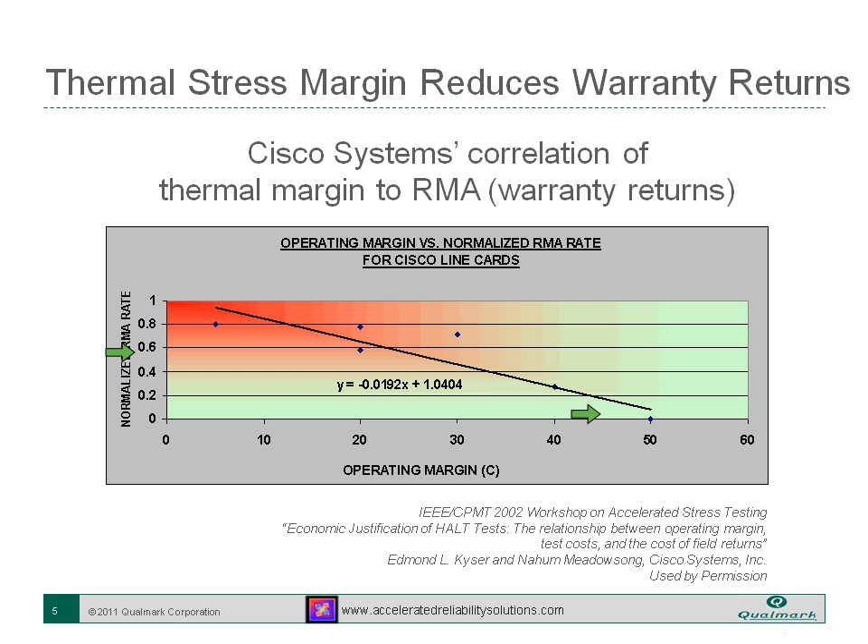But you have to pull it until it breaks. You have to find the limit, the empirical limit. We want to first make sure we get the definitions in order here. What you'll mostly find in HALT, and especially in digital hardware, is the operational limit. That's the empirical limit, not a theoretical limit, but an empirical limit where you actually test the unit and increase the stress until you find it stopped operating.

And that's with, of course, all the over-temperature protection mechanisms defeated if possible. Sometimes they're built in and difficult to remove, such as the CPU. In that case, we would use a water-cooled block to prevent the thermal trip of the CPU, with the rest of the system being able to operate anywhere from 110 C to up to 130 C of upper temperature margin.

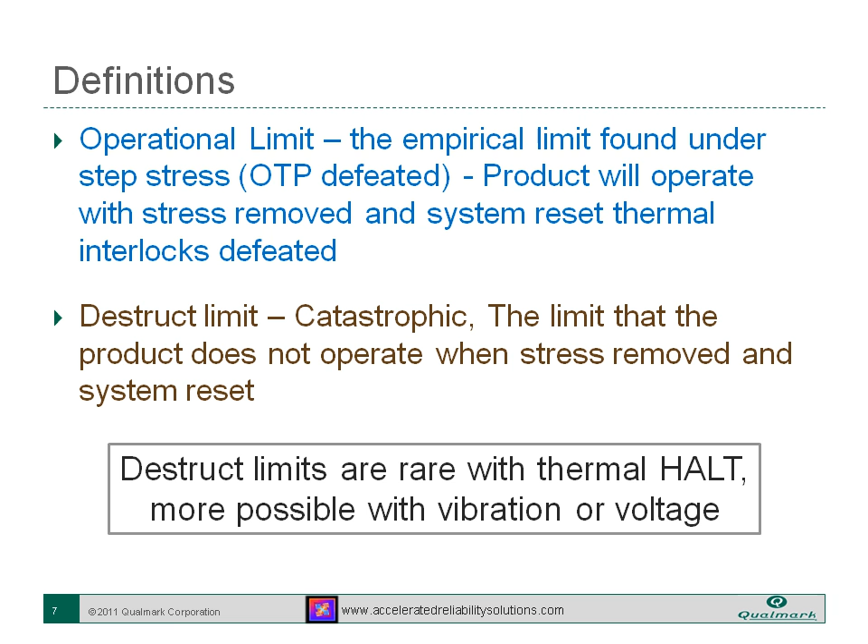It's more likely with power supplies, but still very difficult, and more possible with vibration or voltage. But I have vibrated many power supplies at the top capabilities of HALT chambers, and they survive for a significant period of time.

HALT testing, we want to have a quick review of what it is. It's called a highly accelerated life test, but it's not a life test at all. It's conceptually simple, basically a step stress test. We use a single stress when you're beginning to do HALT.

You want to start out simple to make it easier to analyze the cause of the failures. Generally, we start in an order of cold first, heat, and then vibration and/or voltage, using each one to understand each limit that entails.

Steps are 5 to 10 C for thermal and 5 to 10 G's RMS. But when you get to the first destruct level, as you get close to the anticipated level, you might do smaller steps to get better resolution of where those limits might be.

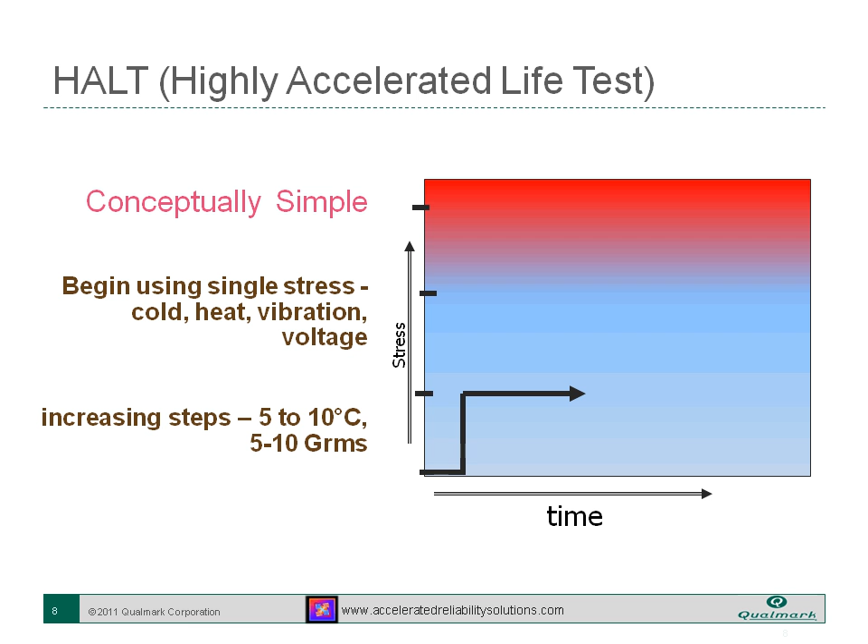We want to stress again to empirical operational limits, and sometimes that is a destruct. Now you have your functional time here.

Make sure that you're testing when the product has reached somewhat of a thermal equilibrium, but you'll also find as you develop skills in HALT that transitions will be important too. At first, just simply ensure that you can have significant test coverage during this period at least.

So your steps may be more than 10 minutes if your diagnostics take longer than that.

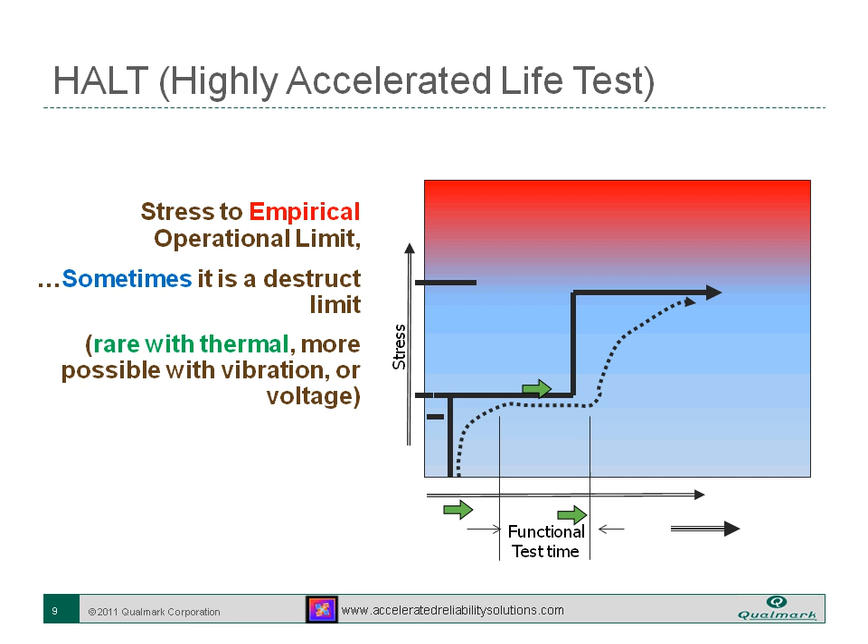So if you can, you want to find the root cause. It's not always possible. You might identify the root limiting component, and if that's the case, it may be easy to just replace that component with a higher power or higher capability component.

And you want to go up to the standard materials, just using standard materials processes, what we call the fundamental limit of the technology. Increase the operational margin till you can reach the fundamental limit of technology.

You will find that you'll set in your own mind a benchmark. Once you start testing your own products and finding limits, then you'll set a new standard of what you should expect the next generation product to be able to operate to.

After you start doing one stress, it's important to also add combined stresses. This is an absolute must in what would be a screening process, a highly accelerated stress screening. Some of those stresses could be thermal, voltage, clock frequency changes, vibration, and even in the IT industry, you would want to use different software applications, different functions such as graphics or hard disk accesses.

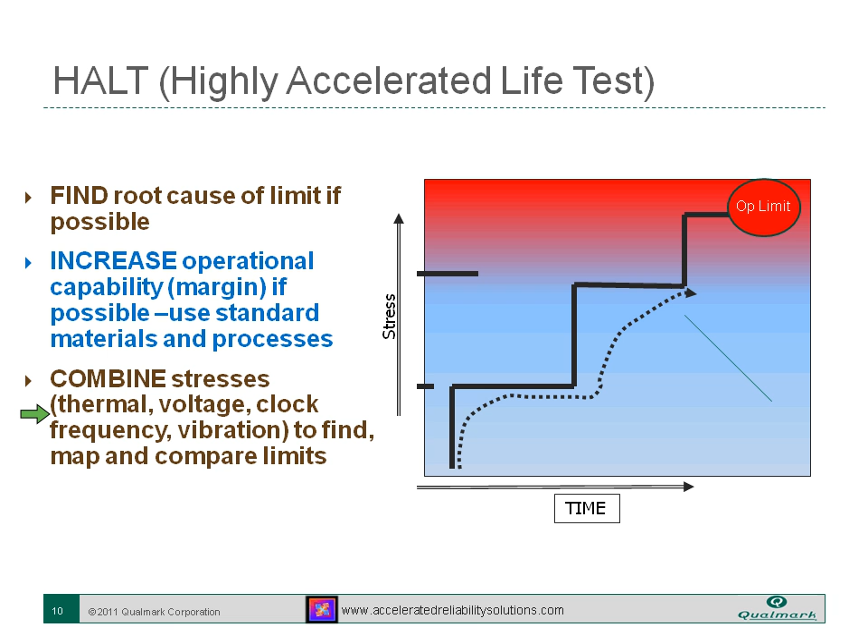There's been a lot of talk in the past, and certainly in the last 20 years, everybody thinks about HALT and the life test, that you should be able to come up with an MTBF number or a lifetime number in the field. The reality is there is no single or combined accelerated test that can give you a system's lifetime equivalent.

I've circled here some of the mechanisms, or some of the devices, that you'd have to model and have an understanding of to be able to give a lifetime number.

You've got a VIA, all these devices, these solder joints, this probably an MLCC, are all going to fatigue at different rates depending on the IC, what temperature it reaches, where it's placed on the board. The VIA is going to fatigue and crack at a different rate. All of them have a different rate in response to the end-use environment.

And you'd have to know a tremendous number of SN curves, various values for the Arrhenius equations, if it's even relevant, and many times it's not. In fact, most of the time the Arrhenius equation is not a valid mechanism driving these mechanisms.

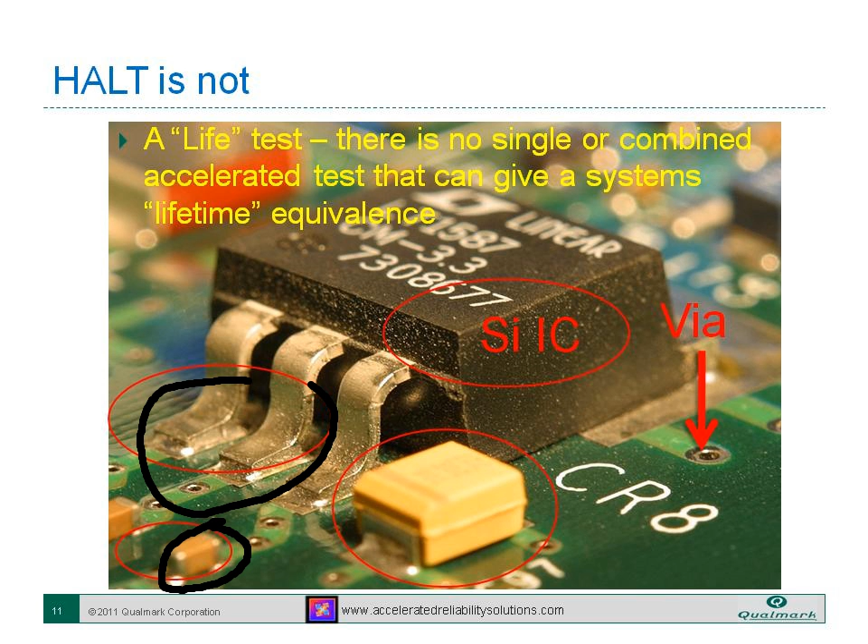Here's a personal experience, and it's about long life in electronics. Our kitchen radio, my father bought this back in 1978, handed it down to me. It's going to last forever, it may outlast my life. But 35 years, and I'm sure the MTBF prediction was quite short, and certainly not 35 years.

But all of our electronics have more life than we need, and we need to start to be efficient at developing reliability. We need to use that life and the broad stress capabilities in most electronic system assemblies. When I talk about electronics here, I'm not talking about individual discrete components. I'm talking about HALT testing performed at a circuit board and operating system level, a motherboard, a graphics card, or a small power supply.

Okay, here we have some components that got the smoke let out. This is a hard failure, of course, and these are fairly rare in HALT testing. You'd be surprised how rare you find these, but it can happen when two components short together during vibration.

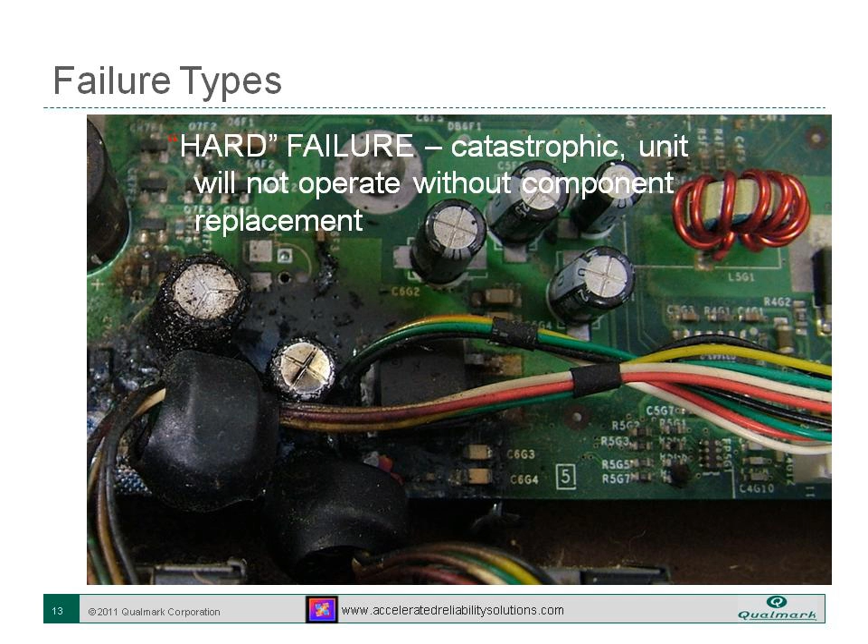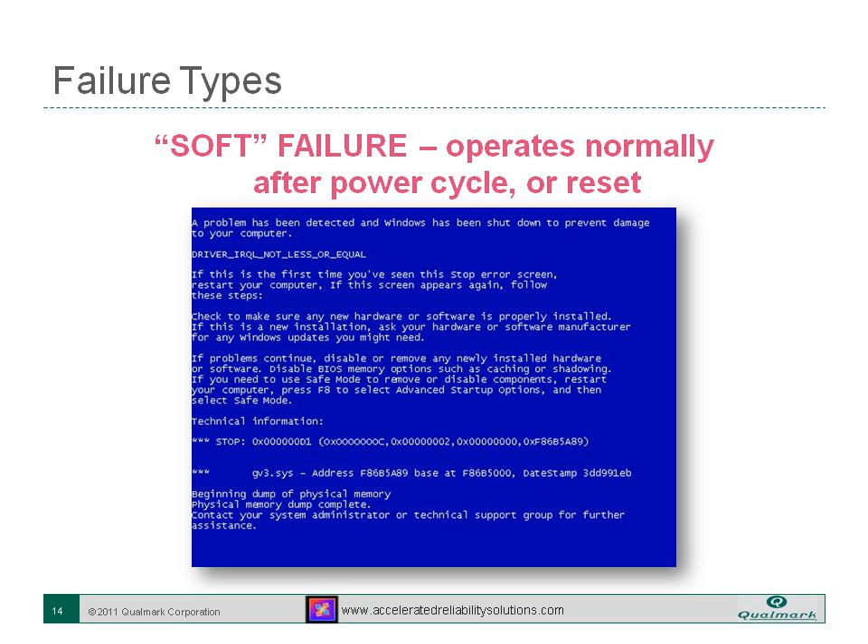And so this is one of the more significant aspects that needs thermal stress, and thermal HALT can do a very good job of helping produce these soft failures at a much higher rate. I have observed that in IT equipment in many of the experiments I did.

So here's a graphical way of looking at why we can be very efficient at detecting the problems during development that we're going to see in mass production in the field.

When you are starting to develop a product, you have a very limited number of samples. Your distribution about a certain parametric value is going to be fairly tight with just a small number of samples. You're certainly not going to see the very low failure rates, or hopefully less than that, 5%, but that could be significant considering what your product is. It's going to be very hard to see that with 5 to 10 or so products.

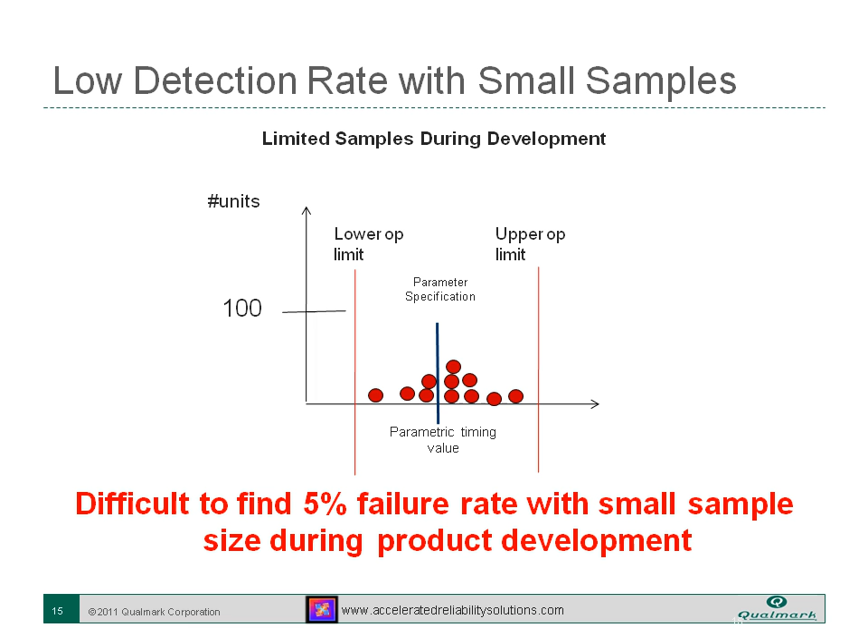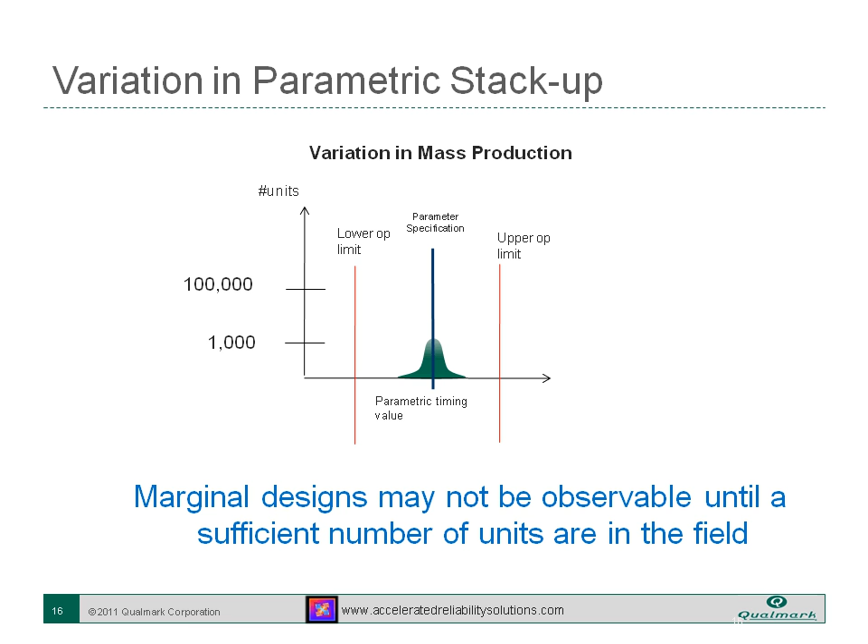But you're going to see variation when you start to produce mass quantities. As you increase the volume of manufacturing, your distribution of components may include second source components. There'll be changes to the product over time as far as manufacturing processes. And what's going to happen is, as you increase this, you're going to get closer to the operating limits.

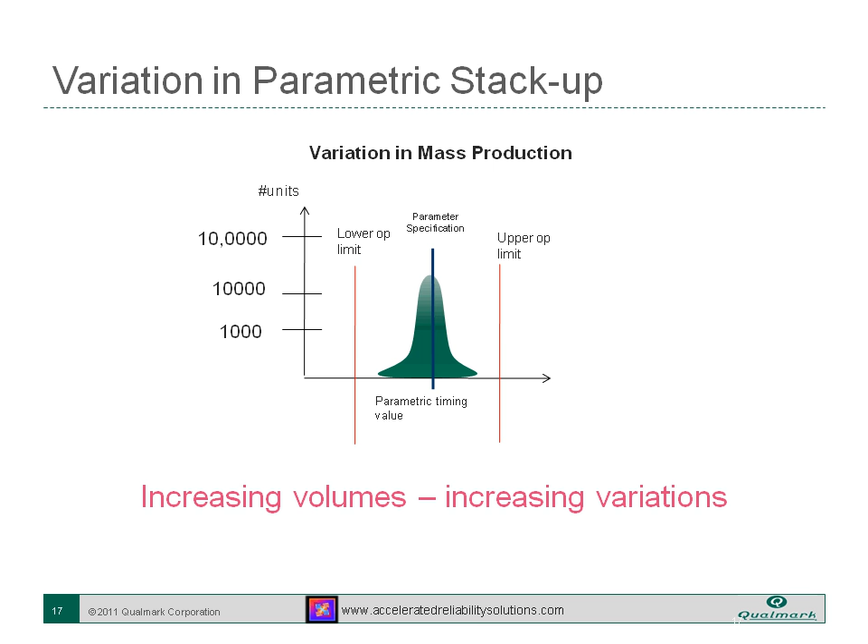Eventually, you may run into this problem where the tails of the distribution, or the most extreme variations, start to get into the operating limits of the capability of the circuit. Now, of course, you've got hundreds of components in a typical motherboard, all having some variation, and whether that variation is going to be a factor in reliability depends on its function in the circuit, how well it's centered in the circuit, and the variation that will occur in manufacturing.

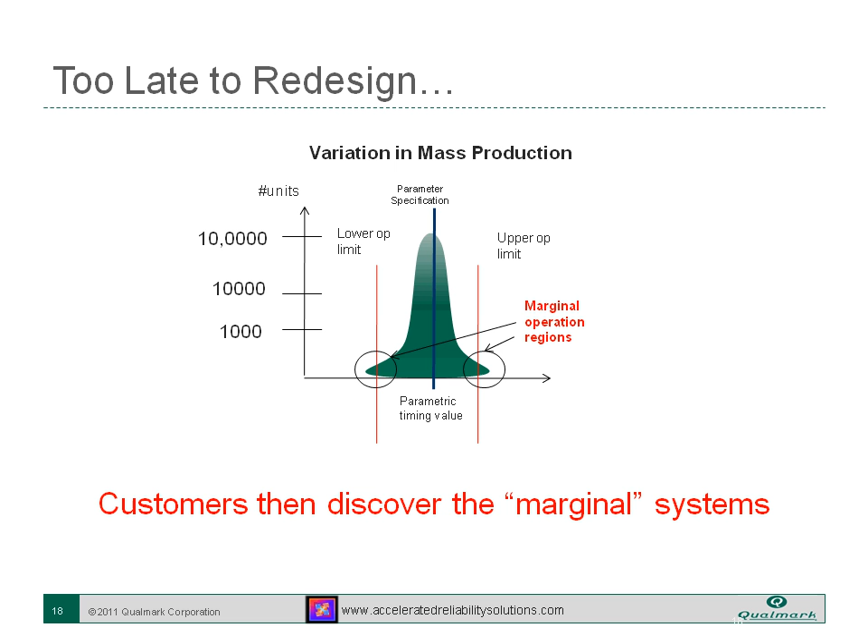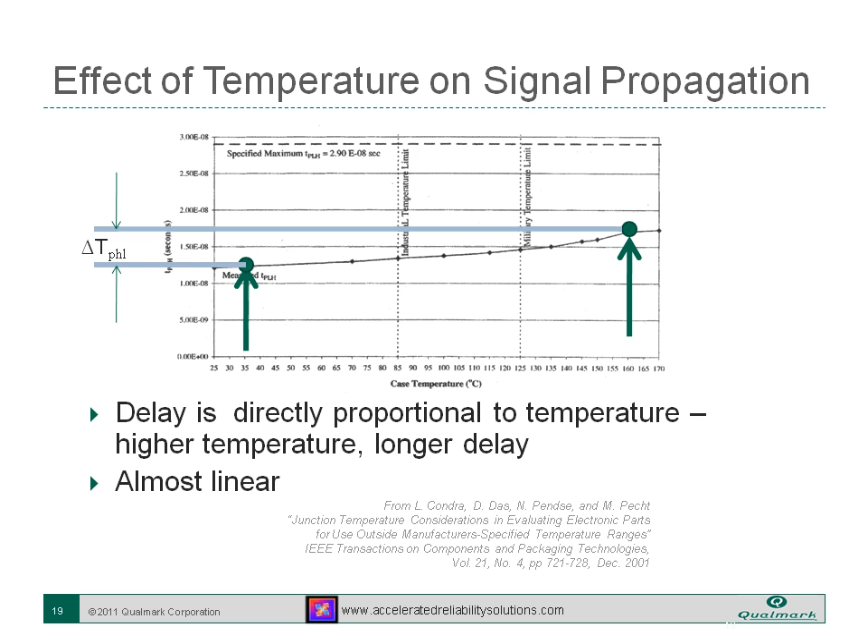So the benefit of HALT, and using HALT to its limit to define the operating limit, is that as you heat it up, you increase the electrical impedance and slow down the signal, as you saw in the previous slide.

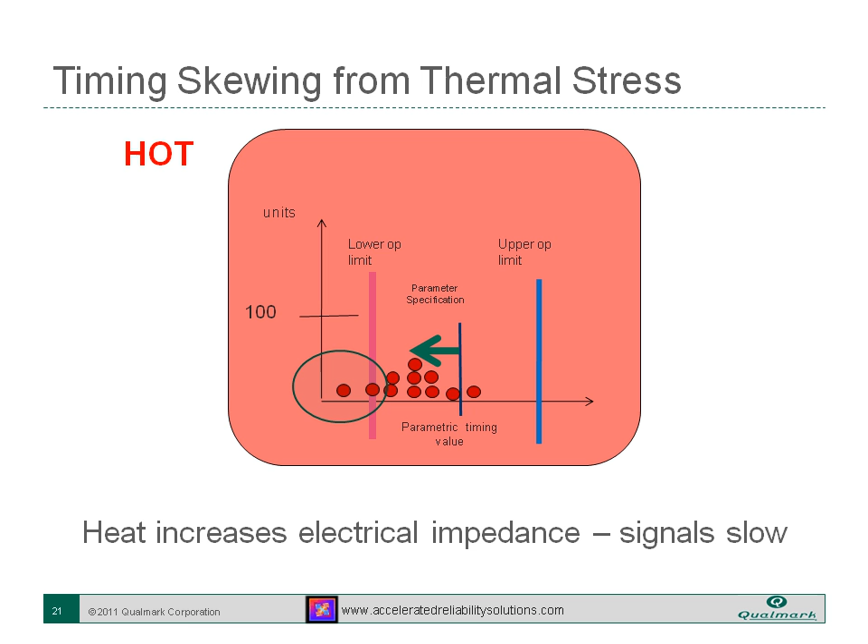And you may push that small group of samples into the lower operating limit and see the failure that you may see in the larger population in the field during mass production. This could also be because of component drift over time, that it would cross into the non-op area.

Of course, with cold, you get the same effect on the opposite side. You start to speed up the electrical signals and skew the timings to a higher speed. Again, you may reach an upper operating limit,

and that can give you a good indication of what your risks are and the variation in the mass production population. I know Gregg Hobbs used to talk about precipitation and detection of screens. I don't believe it's very useful or necessary to go above the operating limit, and especially with thermal, you'll find you have significant room to do testing under if you limit it to just the operating limit.

Of course, you should expand those operating limits to the maximum capability, again, to the fundamental limit of technology.

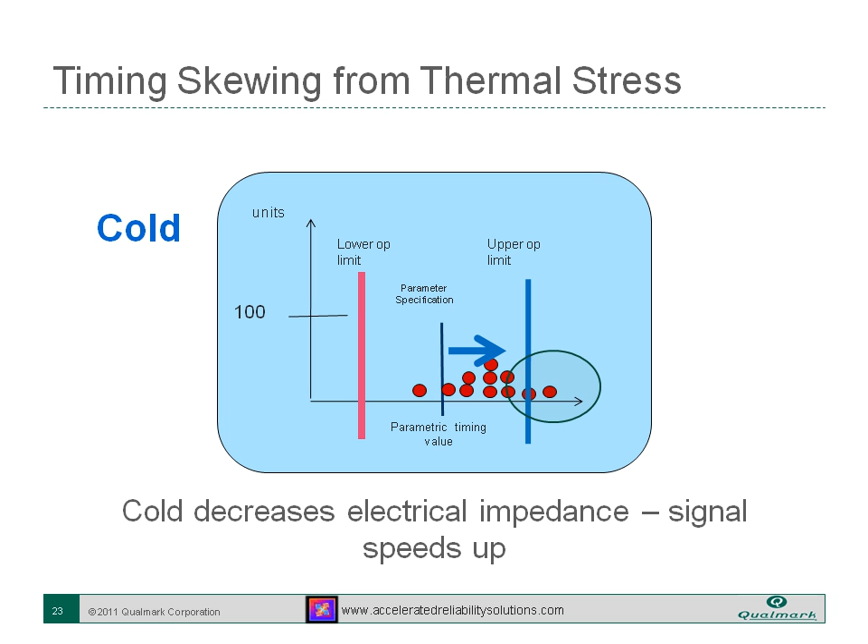And of course, the follow-on to testing beyond spec: if it fails, why should I care? It's not supposed to operate there. Well, that's not really true. There's a lot of reasons for being concerned about testing beyond spec.

Customers, first of all, may use beyond spec. I don't know how many of you know, but in the PC world and digital IT equipment world, 35 centigrade is generally the maximum specified using environment for the customer. Here in Austin, it gets well above 35, up to 38, 39 on a hot summer day, so you'd actually be violating the manufacturer's spec by using a portable computer or desktop outside at 98 degrees or whatever. And we know that customers do that all the time. People do that all the time.

So you're going to get some use beyond spec. All components have margins to allow for manufacturing, and component manufacturers aren't always setting specifications for technical reasons. It may be competitive pressure, market demand,

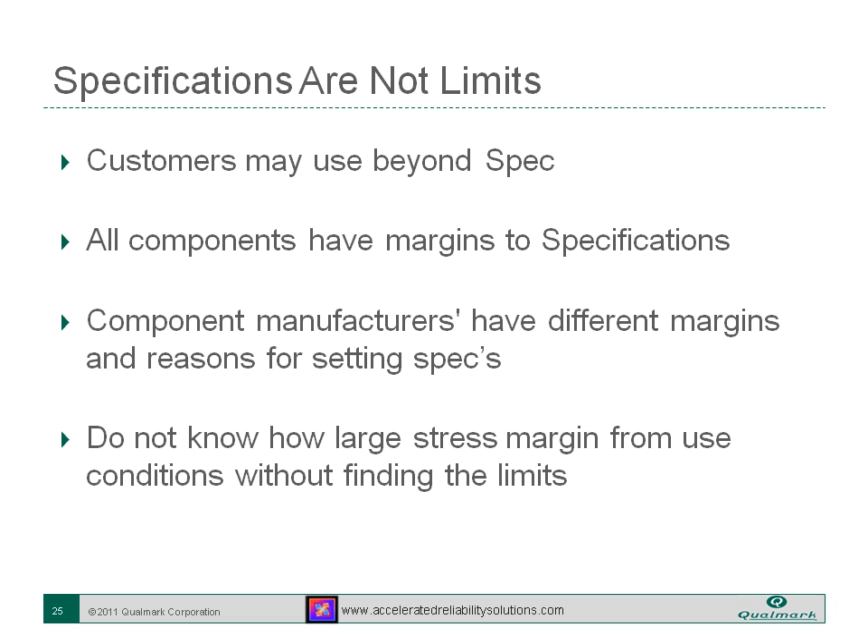Of course, margins can change in time. There is some, especially with RF components and some laser diodes, drift and aging degradation. And again, you never know how the margin of the individual component and its variation will affect the operation of the whole overall system.

It's not always the case that a component failing causes a system failure. I have observed in a system that had 28 of the same devices that the device was manufactured wrong and had a very early life wear-out mode, and in those 28 locations in the circuit, only three or four caused the system to fail. We actually couldn't get the rest of the motherboard to fail with the other devices, all having failed. So again, component failure is not necessarily a system failure.

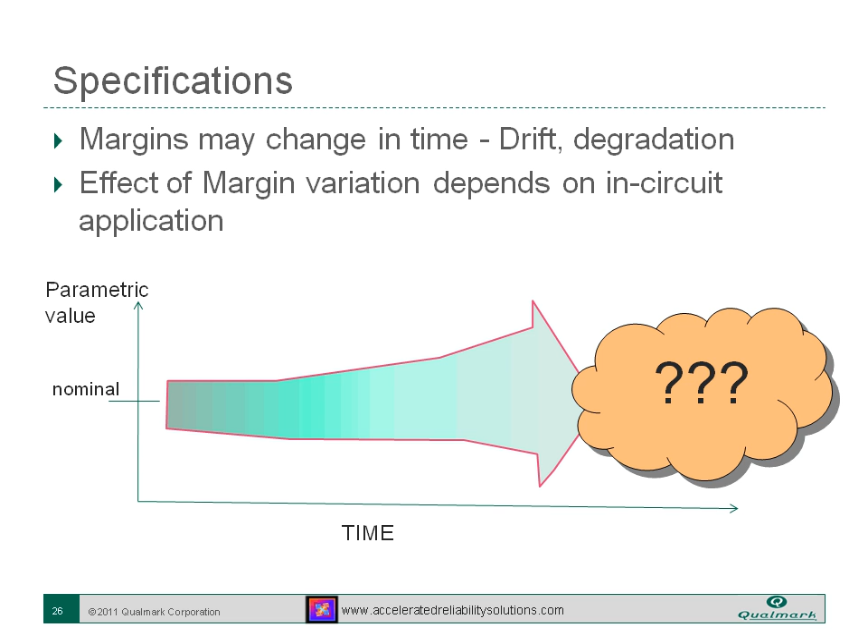This gets back to a real fundamental look at the whole purpose and reason behind HALT, and that is the stress-strength model.

Along this stress-strength axis, you have a load, and of course you have a strength. This can be referring to anything from bridges to electronic systems. As long as the load is less than the strength, you will not have failures.

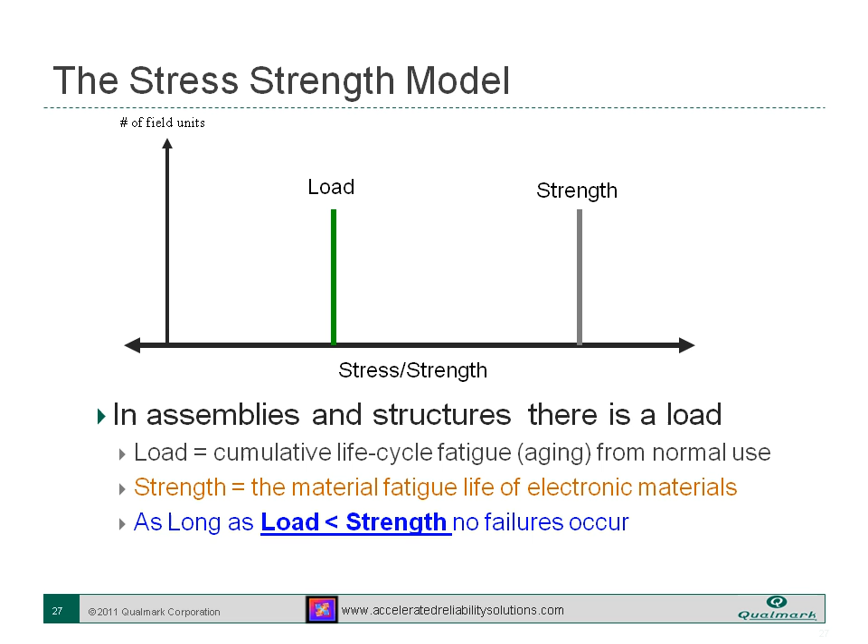Now we know, of course, that there is a distribution about that. We have, for instance, on a VGA projector, some may be mounted on the ceiling where they would have a very low fatigue life. Others could be part of a road warrior's luggage, and certainly they're going to have a lot more fatigue. And at the assembly process, we have some that are going to have a stack-up of tolerance that's going to be lower, and maybe some with a different mix of components will have a high strength.

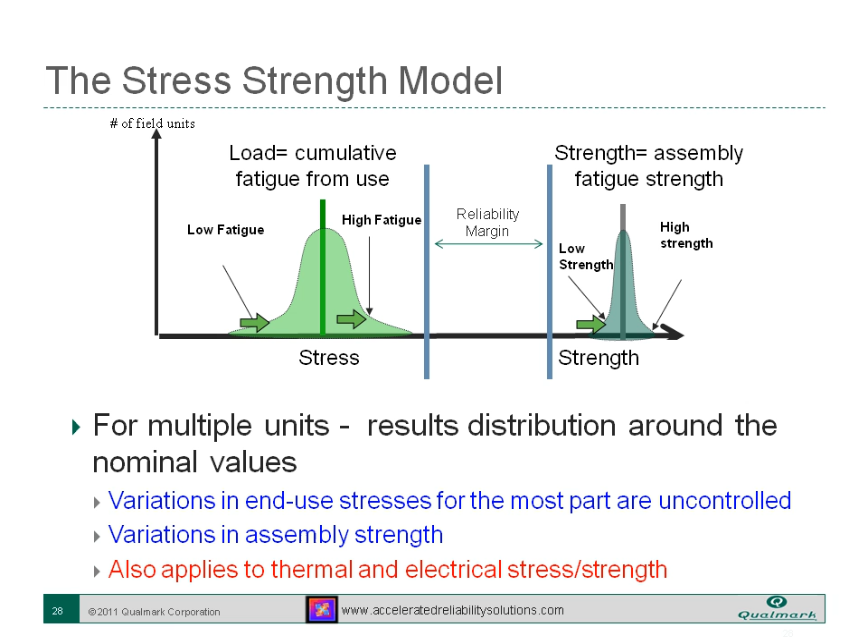The distance between these two is what we call the reliability margin. These are uncontrolled stresses; this is what the customer may use, and it's very difficult to restrict his use. And of course, this is what we hope to reduce variation with through SPC.

As the product ages and the strength declines, we will have the two curves start to cross over. And as they do, the weakest links with the worst cumulative fatigue will start to fail. It's really these tails, it's really the introduction of latent defects or an anomaly in the manufacturing process that for the most part causes the failures.

Wear out is really not a factor in at least consumer electronics, and I'd say any electronics that's used 5 to 7 years that wear out. It's mostly because of mistakes in manufacturing, overlooked design margins, and abuse.

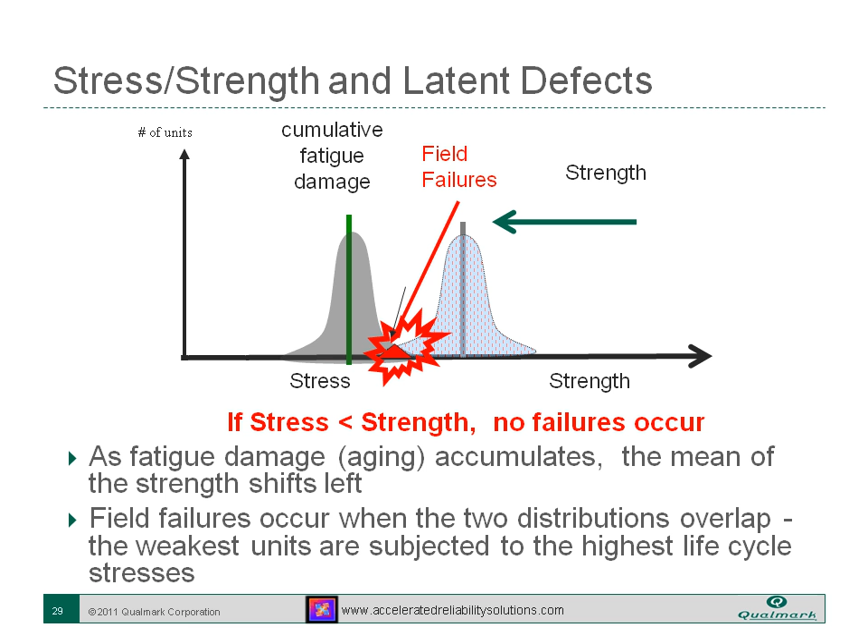So, of course, Dr. Deming taught about SPC and statistical control of your distribution. We all know about Six Sigma and the importance of reducing variation in manufacturing. And of course, that is an ideal goal, and hopefully our suppliers are all doing that.

But in a high volume manufacturing environment, or in a rapid development of product, it may not be possible to have all your suppliers and all of their suppliers perform statistical process control.

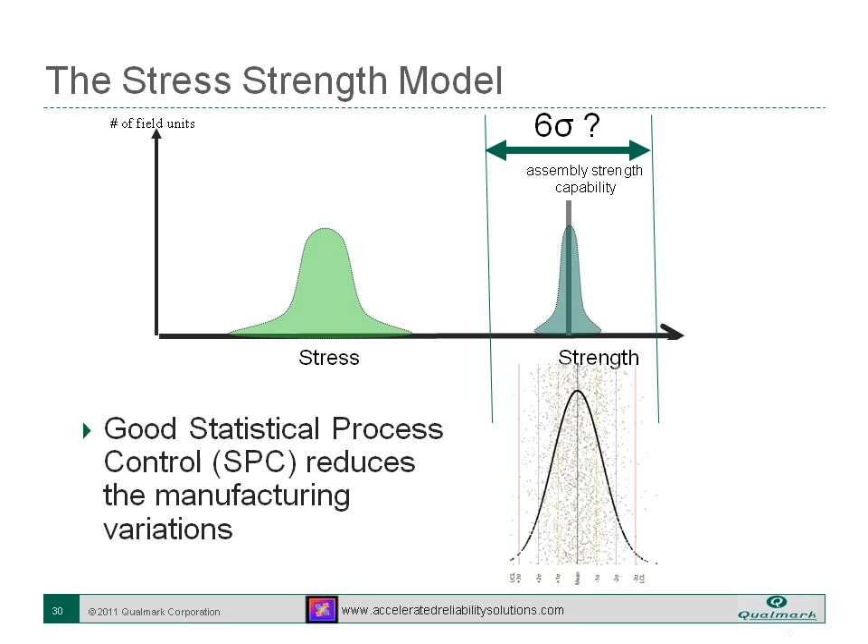And of course, the end-use environment - well, we can give the manufacturing specifications, the end-use specifications, as I say, but they may not be known to the user, or may be ignored. And of course, some systems are going to be subject to actions of abuse beyond the material strength.

The big dollar question, though, is when a customer, say, drops his cell phone or has a stress event with his product - where is he going to say, oh, that was a very flimsy product? Or is he going to point to himself and say, well, I guess I broke it? Either way, if it survives, you're going to have a very happy customer and certainly a returning customer, depending on his situation.

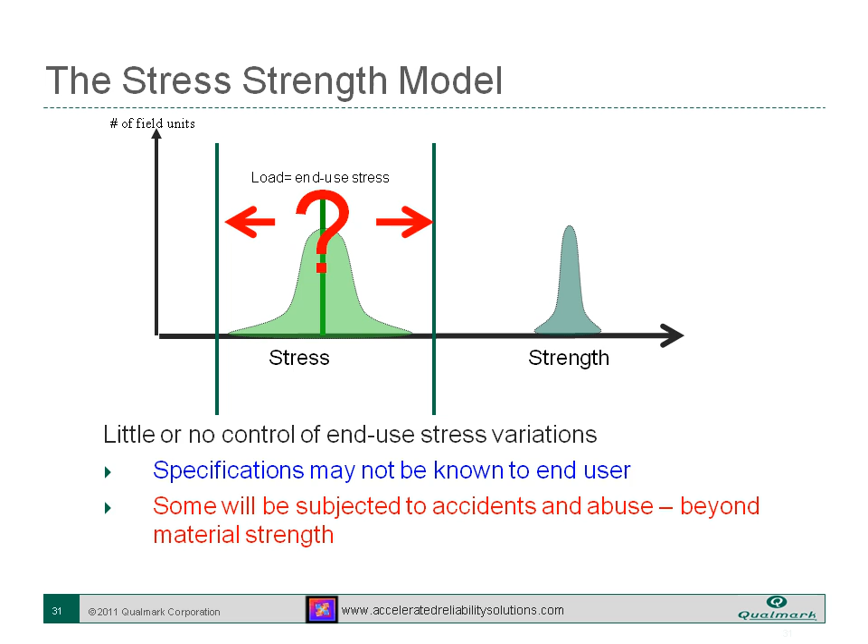Now I want to talk about stress boundary maps and what you can do with combining the empirical capabilities and starting to map out to determine operational reliability risk assessment.

A little bit of the derating boundary might be tested, but that really doesn't give you a clear picture of where you may have a problem or future variation.

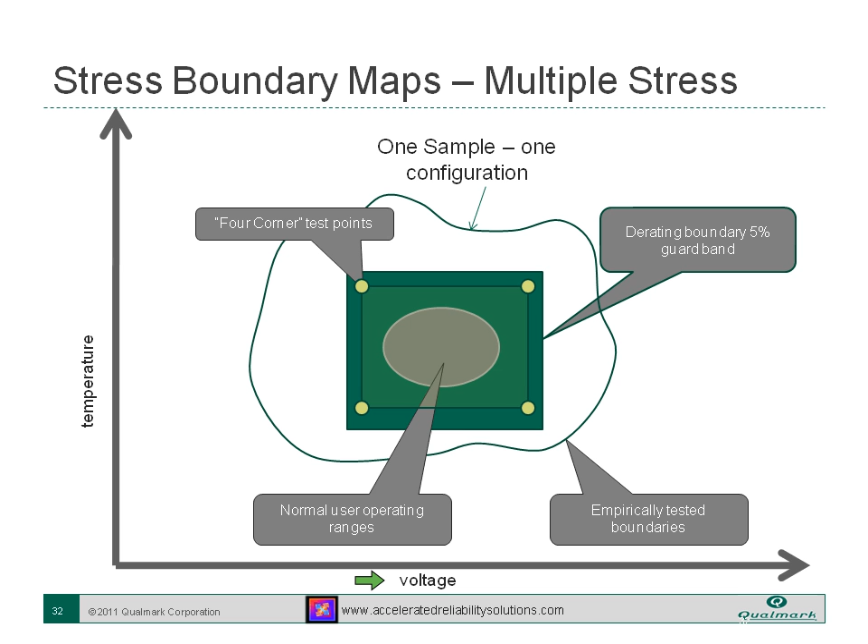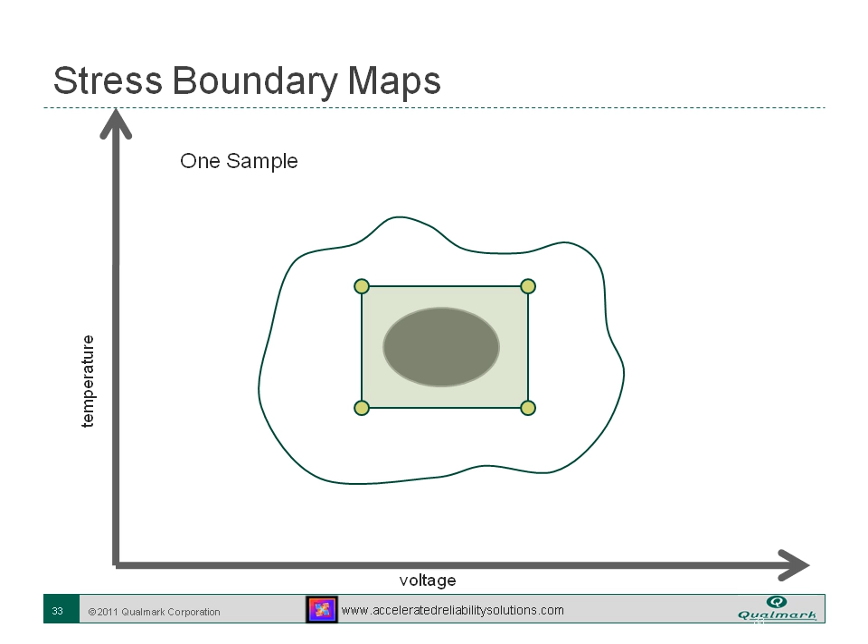As you add samples - well, first of all, one sample, you're going to get one straight line - but as you start to increase the number of samples, you may start, and maybe a second source component... if you can do a few, great, the more the better. But you're going to start to overlay those, and you may start to see now a distribution in that boundary, a variation.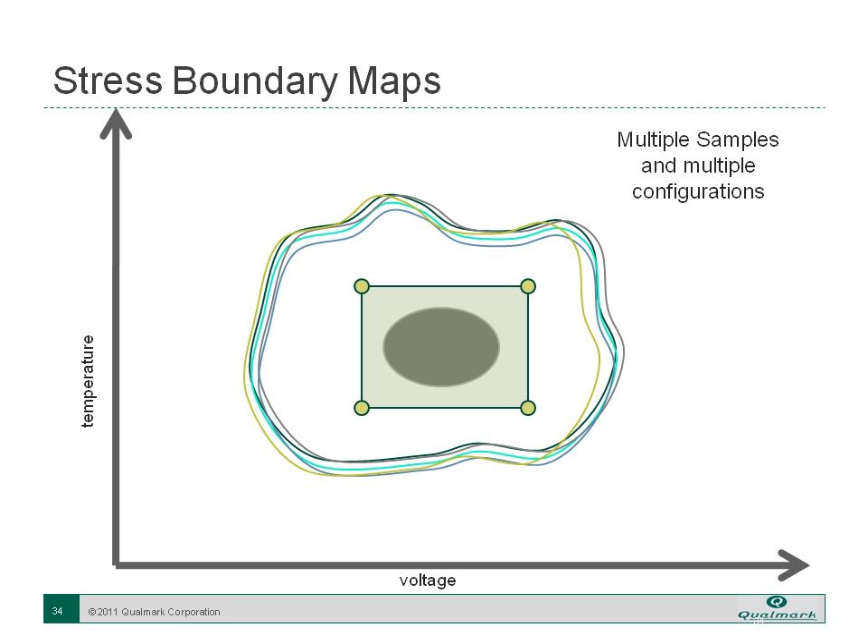And here's a good way of looking at this now that you have a map showing you the variations. You may see there's some very wide parts of your distribution in the empirical boundary map. And some of that variation - it may be a large variation, but it's far away from the end use. You have very significant margin.

In other cases, you may have a very wide distribution that gets a little more risky, in the fact that these tails may start to actually creep in - and this can be, again, over time too - that these components causing this variation may start to drift into the actual worst case in-use environment and cause intermittent or failed operation.

And this gives you a place to start to investigate what is the cause of this wide variation in this boundary, and see if you can reduce that with an increase - either increasing the margin or reducing the component specification - some way to reduce that variation in that boundary.

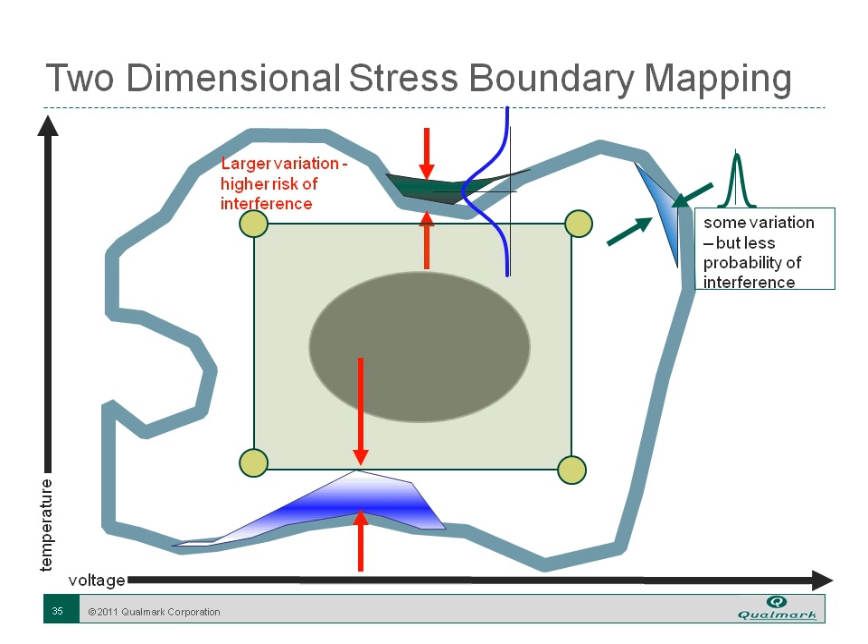But also what can happen with a component, it can also cause these boundaries to drift in an individual assembly that you may have. Again, the need to build up as much boundary, as much space, margin as you can, to help ensure that that reliability margin throughout the product's life is going to be significant.

As I say, there is so much life in standard electronics, solid-state electronic hardware, that we really don't need to be worried about calculating. We need to be worried about finding those things that impact the long life entitlement of electronic hardware.

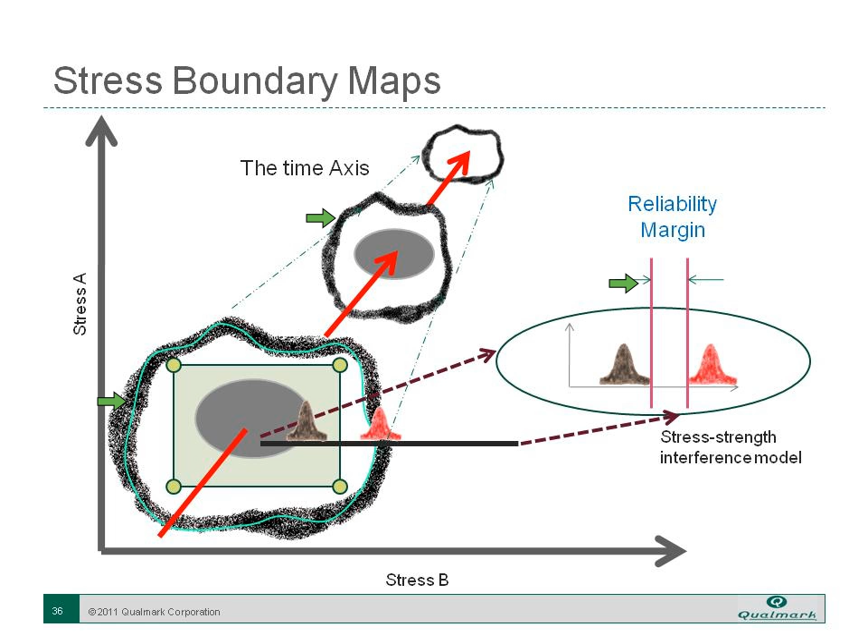Okay, and the big question is, can HALT find software defects? And of course, I found out from my 7 years experience in IT equipment that yes, it can. I'd love to show you lots of data about it, but I will show you at the end of this an Intel case history about how they use thermal stress to find a software defect.

I will give you some anecdotal evidence. One of the tests I performed, I had the opportunity to take 2 computers returned from 2 different customers in the field, and they had reported an intermittent failing, soft failure condition. Those were taken back to the failure analysis lab and spent 5 days trying to reproduce the failure mode. The units were declared no fault found, or CND, cannot duplicate.

And of course, this is a big problem in the IT industry. There's a significant number of units coming back and a significant no fault found population. A lot of times those will go back to the field for repair as repaired parts or as warranty replacement parts. We placed those two units.

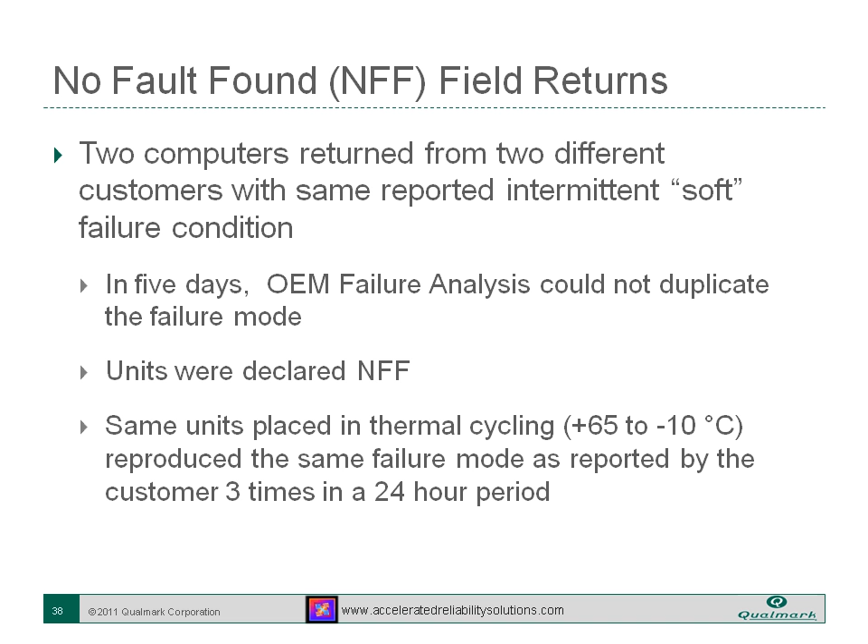And this is the reason we'll go into why thermal energy is so useful at helping with, as we showed before, the skewing of timings, which is a big part of the problems of operational reliability in IT equipment.

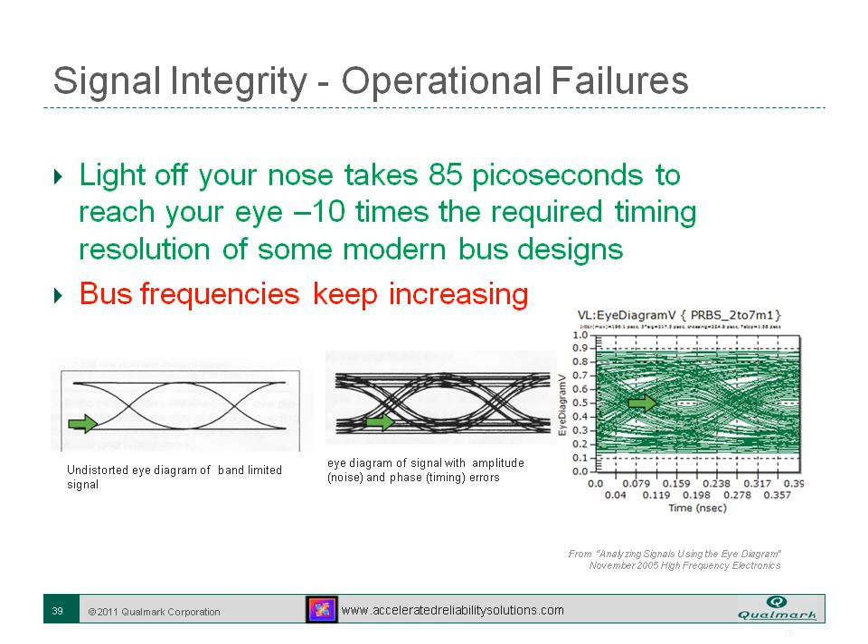Once you overcome your fear of permanent damage or changing the performance characteristics of a product by reaching the operational limits, there's a lot of room underneath the limits to actually do significant application work and try things out, but you have to overcome the fear that you're going to permanently damage products.

As these speeds increase, effects that were only second or third order before are now becoming dominant, and they may be very difficult to model in the time that we usually have in typical development cycles of commercial equipment. As we decrease the metallization widths and so on as Moore's Law continues, we're going to see more sensitivity to fabrication variations.

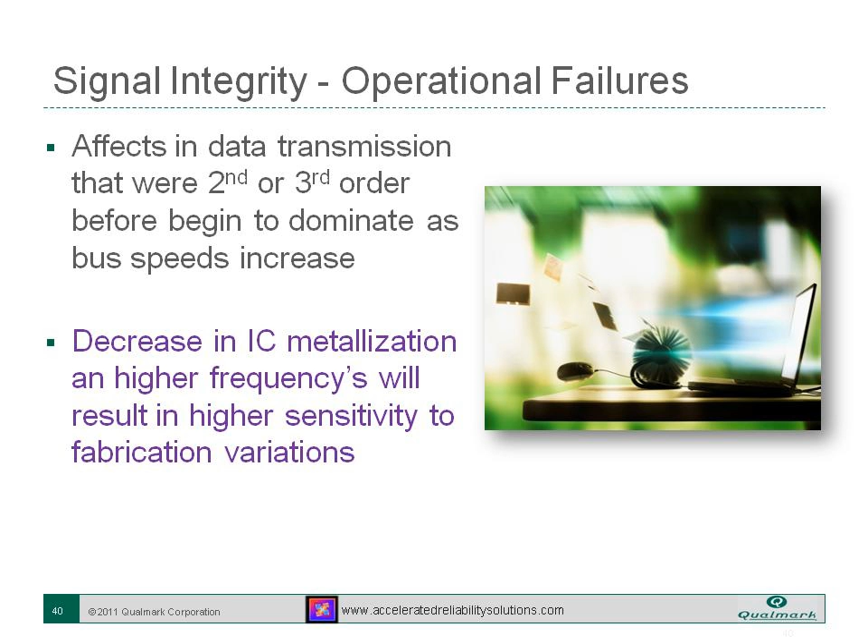Therefore, I think it's going to be much more critical to tighten the control and monitor, especially the thermal stress, the ongoing production, to make sure those variations don't interfere with the reliability.

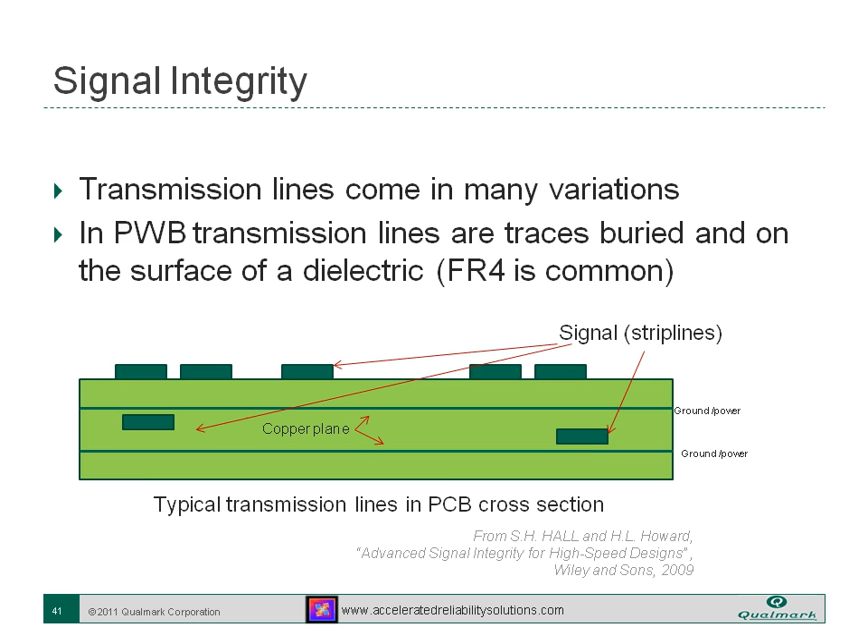And of course, you have each conductor having its own electric magnetic fields, producing noise, crosstalk, interference, and it depends on the proximity, spacing, lots of different factors. Even the copper surface affects the inductance and resistance, and there are some trade-offs with that, of course, because it would be ideal to have a smooth surface for the conduction, but it's got to be rough to make sure the adhesion between different layers is capable.

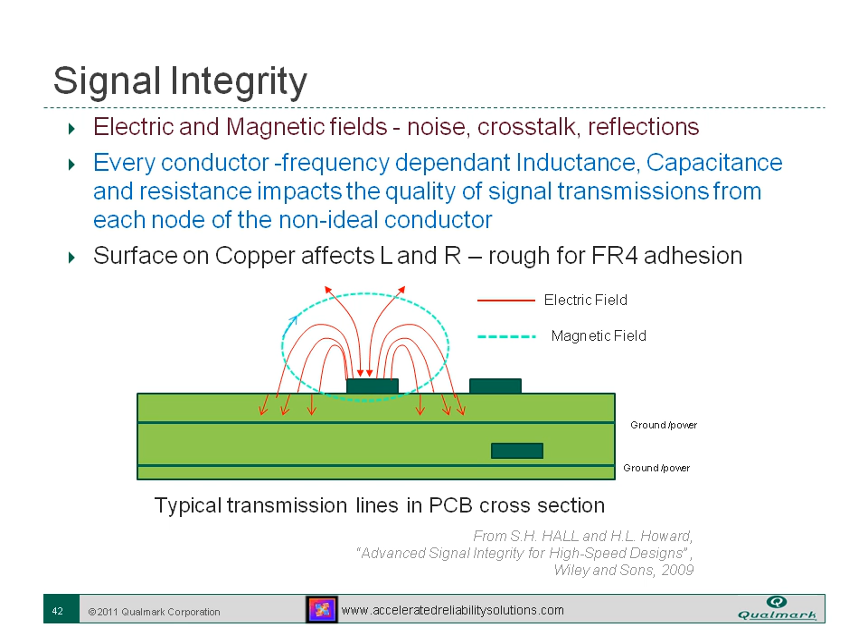Even the fiber weave effect - you can't expect that the whole surface of the FR4 material is going to be homogeneous. You have a problem with moisture absorption, and the relative humidity can make a difference in signal insertion loss. So there's another variable that can affect reliability, which would require pretty significant and complex calculations to know where you might arrive or where you might have problems in the future and in variations in manufacturing.

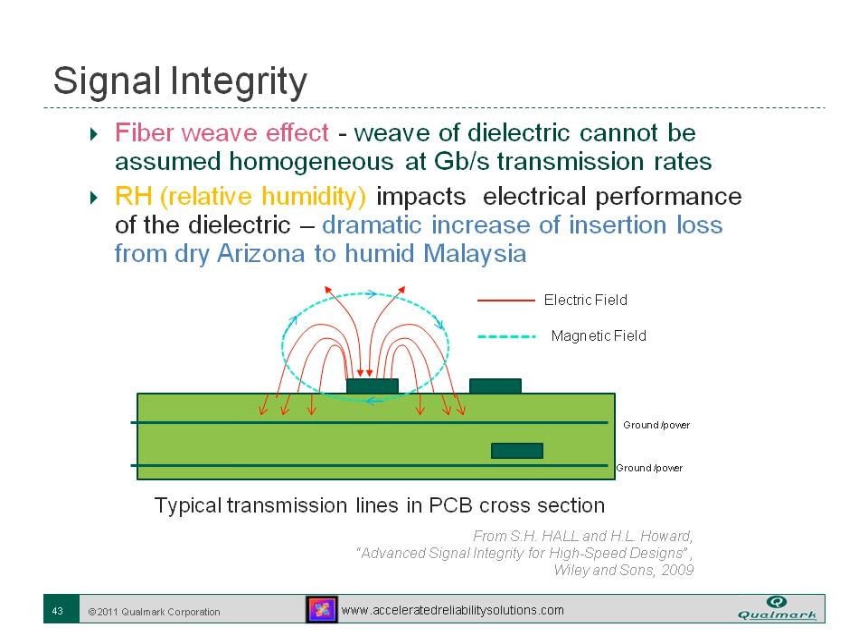So another aspect that helps create thermal mechanical fatigue: if you have an actual cold solder joint, you're exercising it mechanically and can get it to open up and become a detectable latent defect. But the fact that heat also slightly changes the dimensions of the board as well as the impedance of the materials means we skew the function and some signals a little bit. In manufacturing, we hope the variation is only slight to ensure consistency in signal integrity.

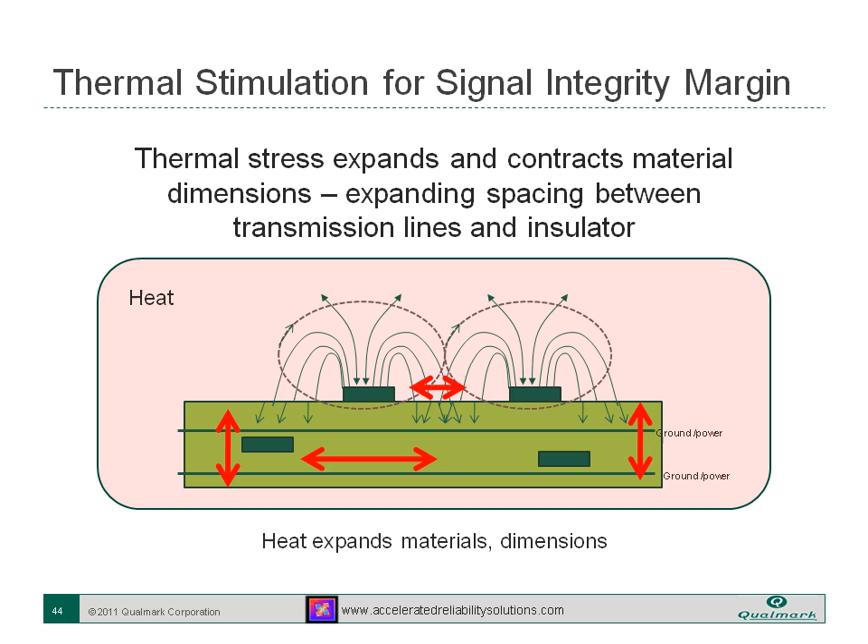With cold, the opposite happens. We contract and change the impedance, either increasing or decreasing it. So we're stimulating some of the variations that will inevitably occur in mass manufacturing from lot to lot. And when we have an operational issue in a small number of samples using HALT, there's a very good chance it will become an operational issue in some percentage of manufacturing product in the field.

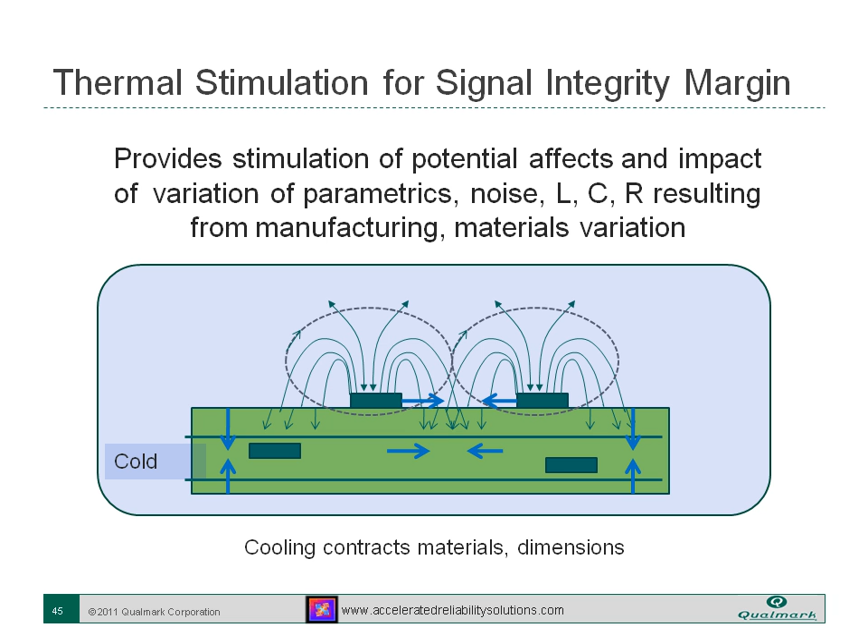One of the important things to try in HALT is also thermal cycling. The great thing about HALT chambers is they can do very rapid transitions in temperature. Depending on the thermal mass of the devices, their power dissipation and other aspects, you start to get differential cooling in the transitions. Some larger, thicker, heavier, or higher wattage components may cool at a slower or higher rate, so you start to mimic the parametric shifting that normally occurs in mass manufacturing with a larger number of units.

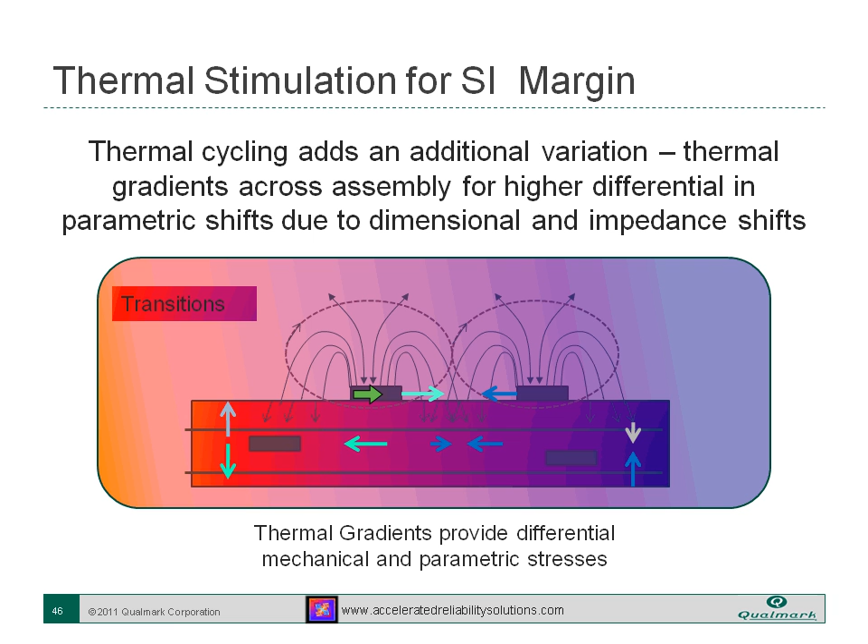So you get real synergy in these transitions, as well as producing very high thermal differentials which create higher thermomechanical stresses, providing a more rapid precipitation of actual hardware delamination and defects in the products.

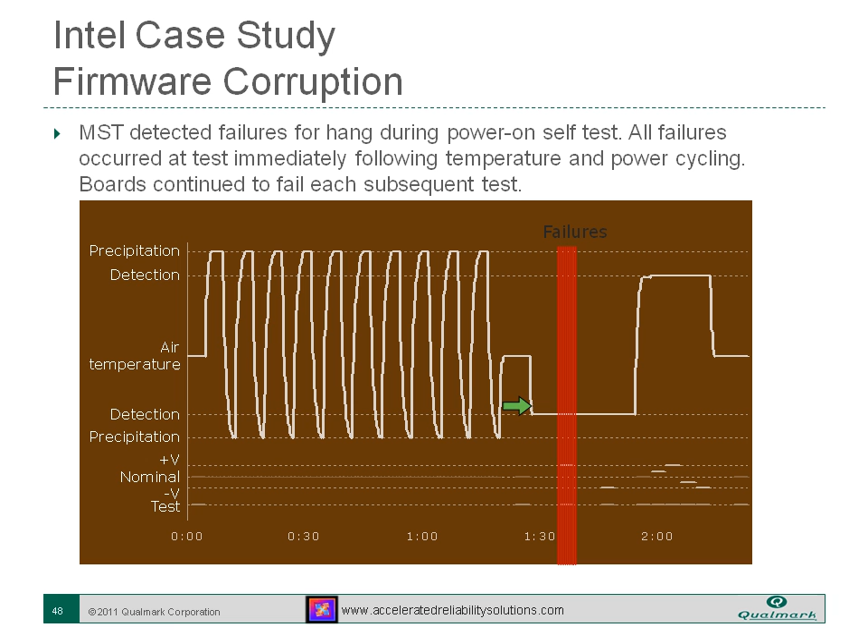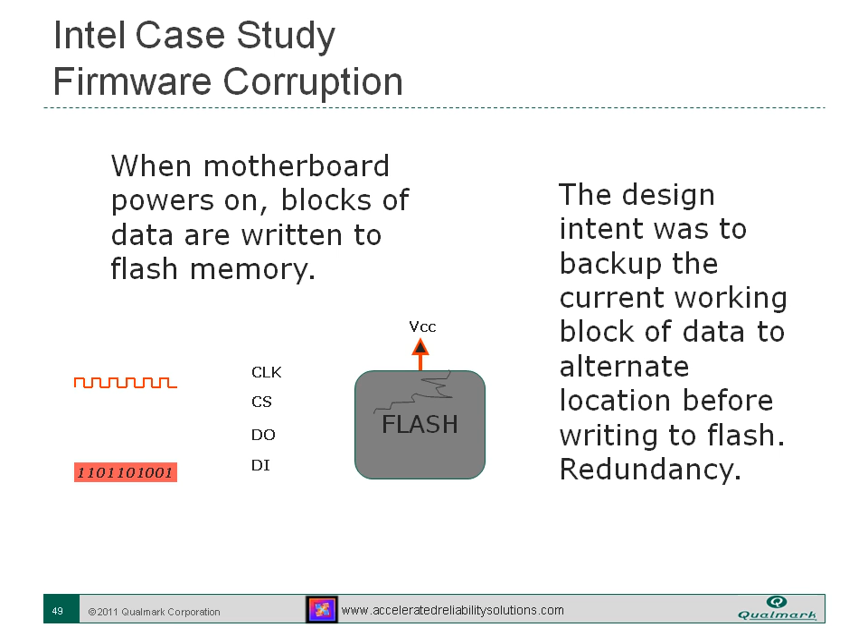What they found was there's normally a function where the motherboard powers on and, for redundancy, backs up the current working data before new flash information is written. Power cycling, an excellent tool especially in IT hardware development, uncovered a firmware design issue. It interacted with probably a small tail of the distribution, causing an unrecoverable memory corruption. Losing data is pretty serious and obviously caused a problem, but only a few percent of the product was susceptible—again probably outliers in the tail of the distribution.

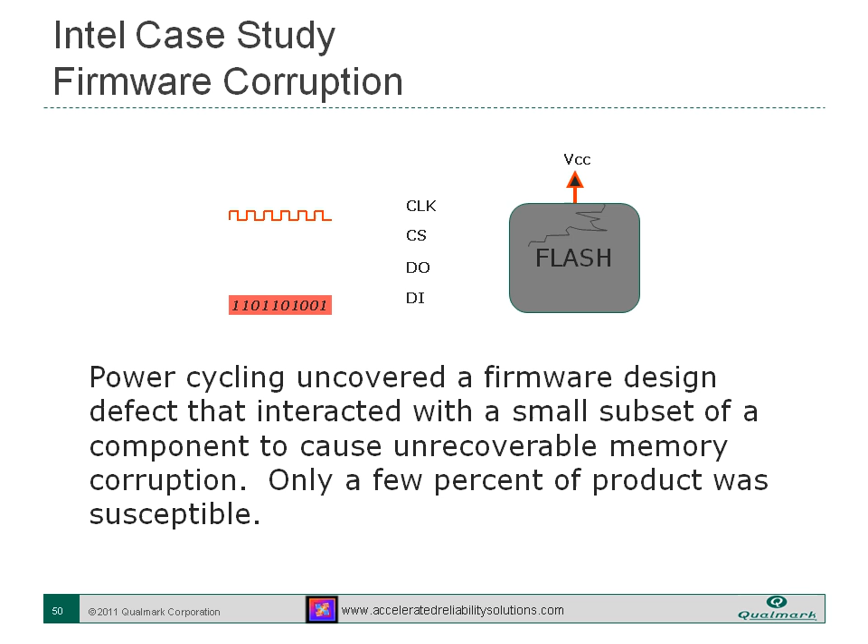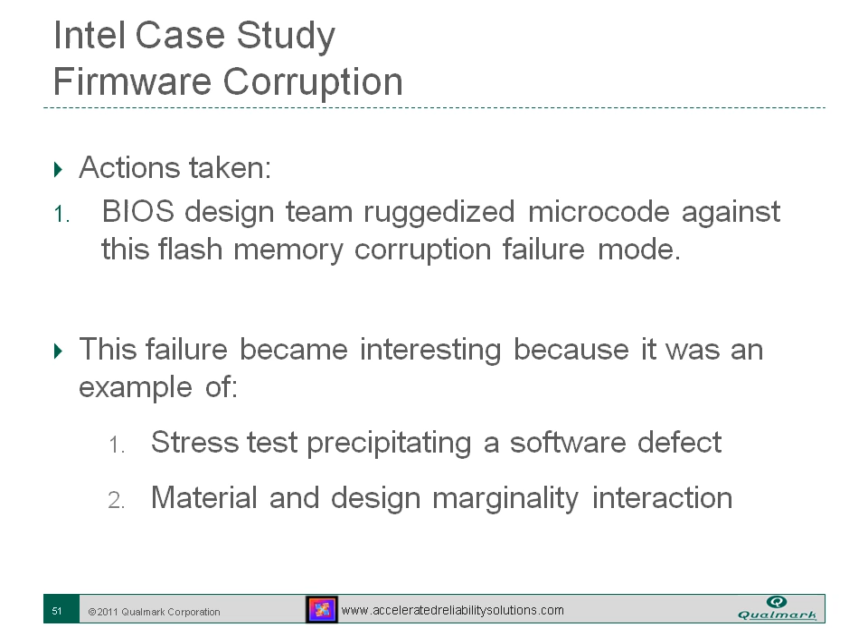The action taken to fix this was they changed the BIOS. I don't know the exact details, and Walter didn't give it, but I'd guess there's probably some timing aspect involved. But it was, again, an example of a stress test precipitating a software defect and a material and design marginality interaction. I'm sure once this flash was reset, it probably worked fine, with no permanent damage to the components. So you've got lots of life in components—you can stress them quite significantly without much degradation. And you've got to start using those.

Kurt, can you explain what MST is? Manufacturing stress test. This was a test done during the manufacturing process, like a HASS screen essentially. This is not caught during development. I don't know what Intel's use of HALT is during development, but most likely it would have been caught if it had been in HALT. Just showing that thermal stress can find software issues.

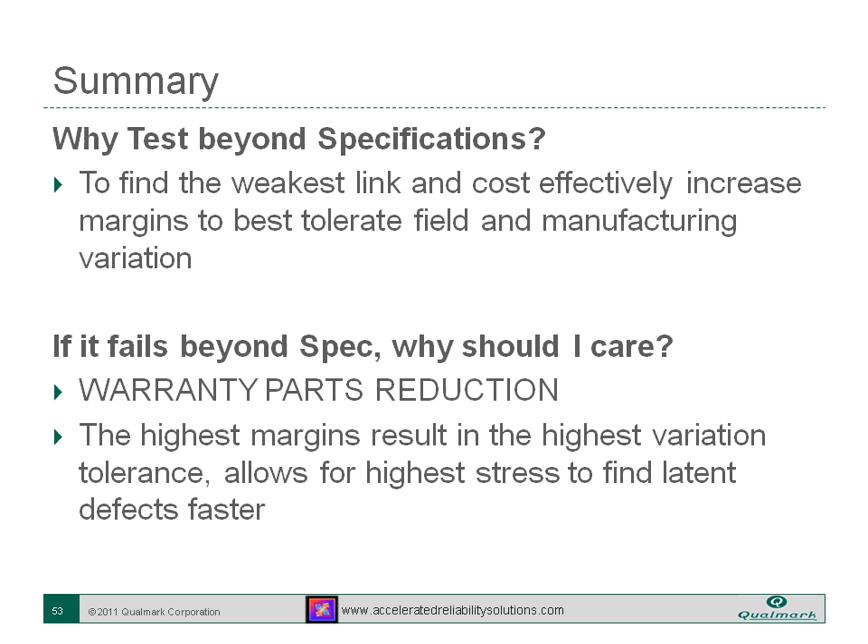We saw that it does, and there are other papers out there showing that software defects can be found as well as hardware defects. So there's a double benefit in using HALT and HASS in that you can not only look for discriminators and find changes during the stress cycle, but it also physically fatigues the product. So if there's a hard failure or a hard latent defect that will cause a hard failure, you'll find that also.

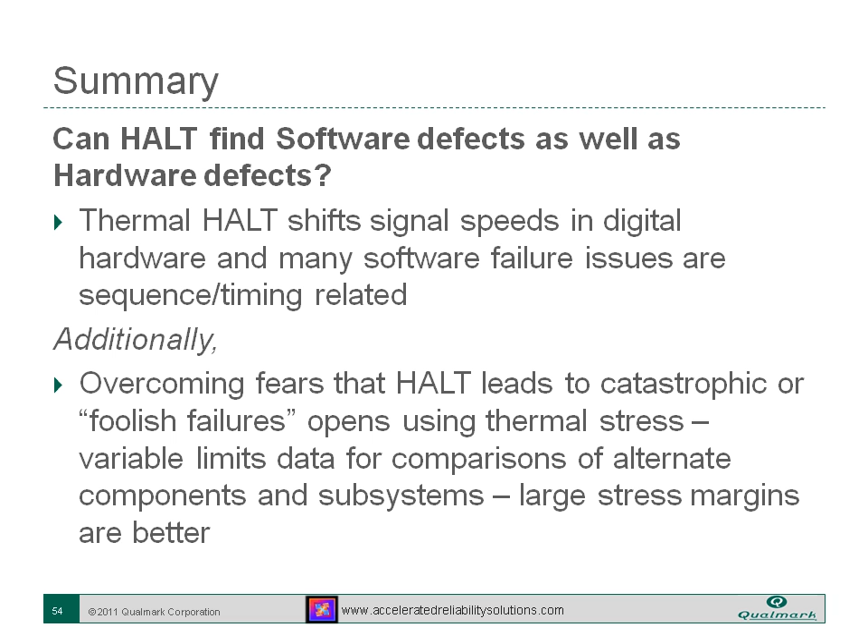We must overcome, everybody that hasn't done this yet must overcome the idea that everything is going to fail, that it's going to be a big mass of melted metal and plastic. Generally, as you find when you start doing HALT, and over the 20 years I've been doing it, it's sometimes very difficult to break a product, but you can always find its limits. And those limits are variable data that can be used for significant insights into comparisons of configurations, comparisons of potential components and subsystem suppliers. There's just lots of things you can do once we overcome the fear that we're going to cause massive destruction of our product.

I really didn't get into predictions of lifetimes, but failure prediction methodology doesn't work. It doesn't give lifetimes. It's not, for the most part, valid. There are some mechanical wear-out mechanisms that it works for, but those are few and far between. For solid-state electronics, the lifetime is more than you need. Just as an example, with that table radio, it could be 30 years. Most of us will never know how long the actual inherent life of chips is today. I mentioned previously the many opportunities for reliability discriminators using prognostics, which is now the common term in the industry, prognostics and health management. And I think we'll find many better discriminators under stress conditions than ever before if we take the new paradigm of HALT and HASS and the stress limit paradigm.